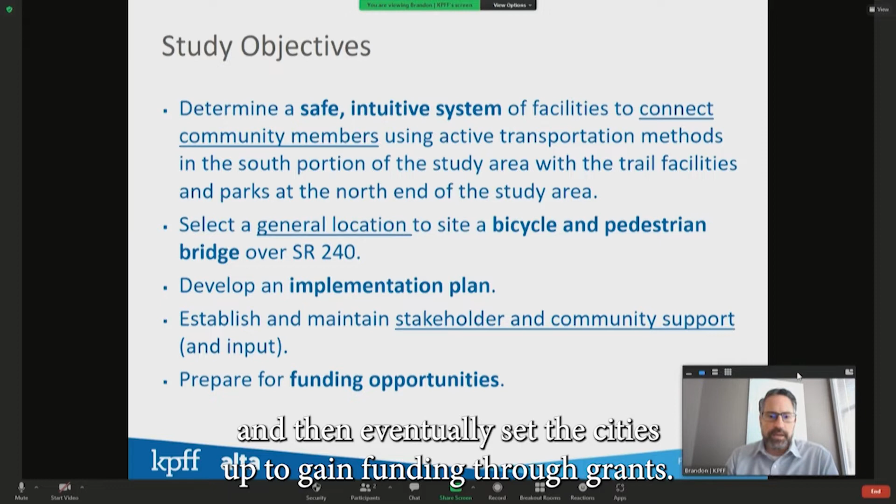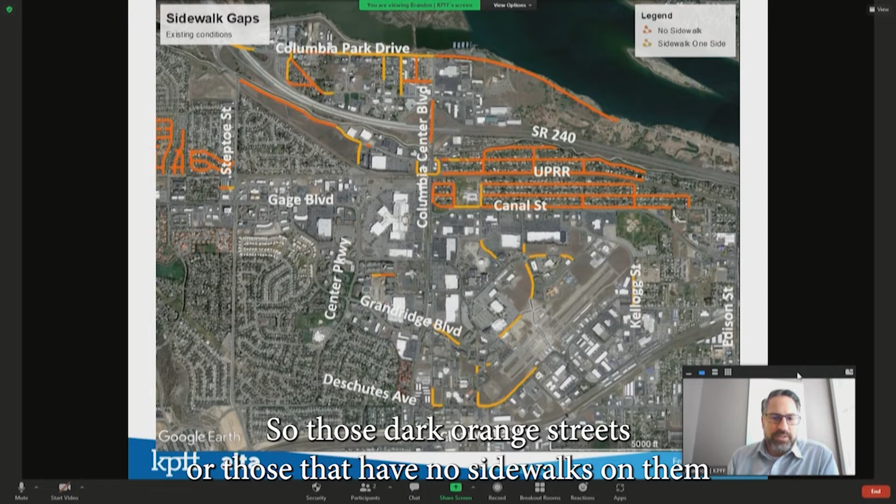So to begin with here, we're looking at the sidewalk gaps. One thing we discovered was there are certain pocket neighborhoods that were probably built in a certain time frame when sidewalks weren't required or based on certain standards. Those dark orange streets are ones that have no sidewalks on them. The lighter yellow lines represent streets that have sidewalk on one side. Those are generally in areas still under development, and the expectation is that those sidewalks will be filled in over time as development occurs.

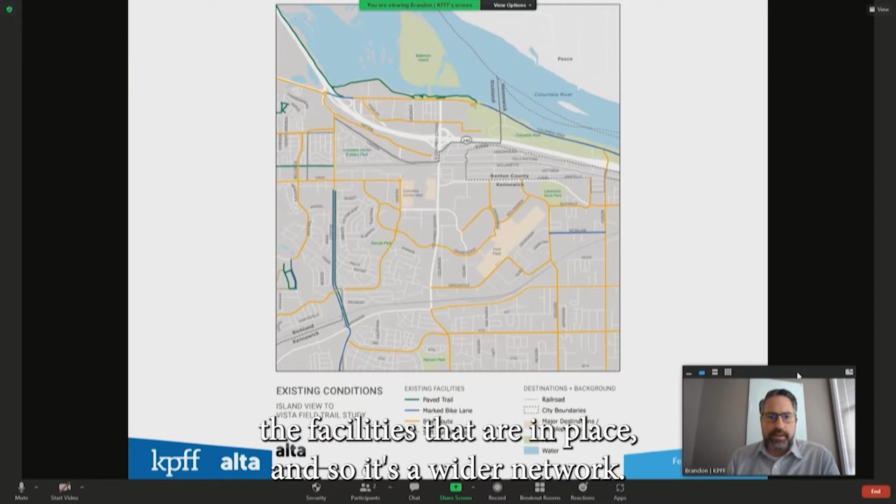When we look at the bicycle network, on the other hand, these are the facilities that are in place. It's a wider network, not as tight as the sidewalks—you try to see sidewalks on every street, but for bike facilities we look at them every quarter mile at least. These are the facilities currently in place.

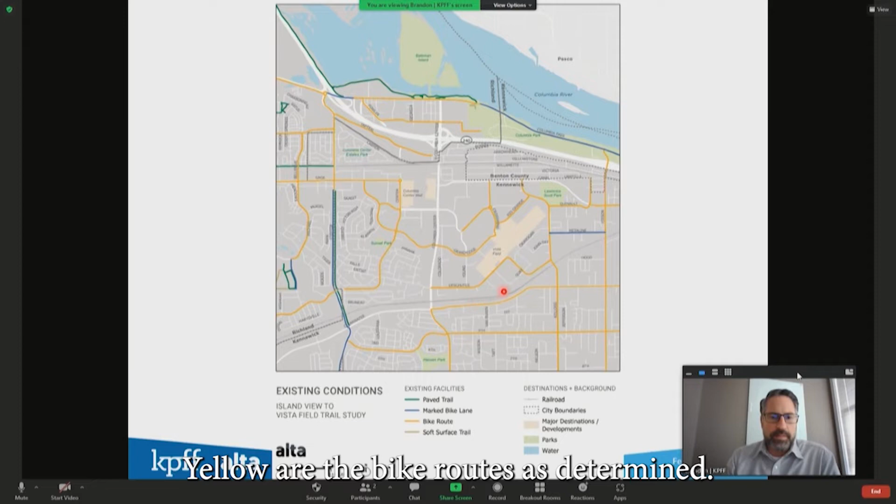You'll notice there are certain colors here. Yellow are the bike routes as determined presently—those are facilities that have a widened shoulder along the side of the street, but not necessarily a bike lane with symbols indicating that's your space. The blue lines indicate areas where there is a bike lane, and the green lines indicate trails or paths.

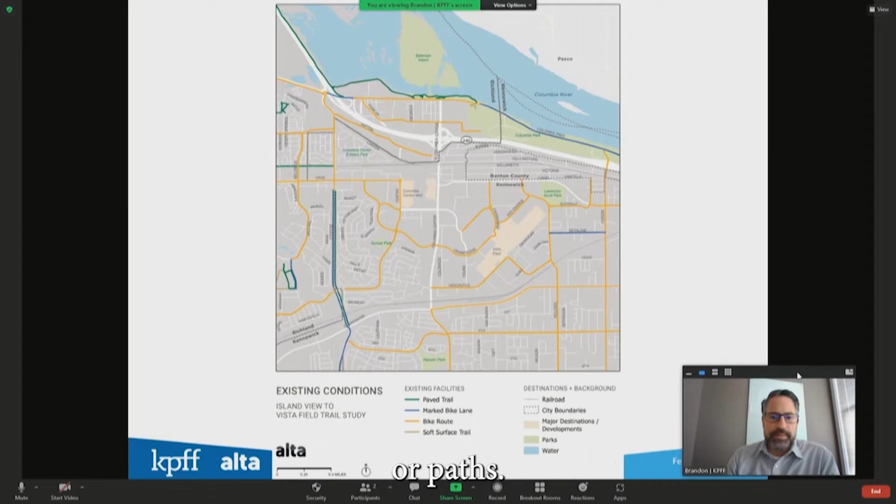We looked at this as a view of the level of stress experienced when you bicycle on these streets. We indicate that by the letters LTS, level of traffic stress, on a scale of 1 to 4. If you're on an LTS 1 street, this is comfortable for all ages and abilities—one a family isn't afraid to take their children down. This is probably a very low traffic residential street or a separated trail where there's no chance of traffic issues.

Whereas LTS 4, the other end of the scale, is high traffic with very low facility service, whether that's just a shoulder with no bike lane. Really your hardiest of riders are the ones comfortable there—if they're even comfortable, that might be a challenge to state.

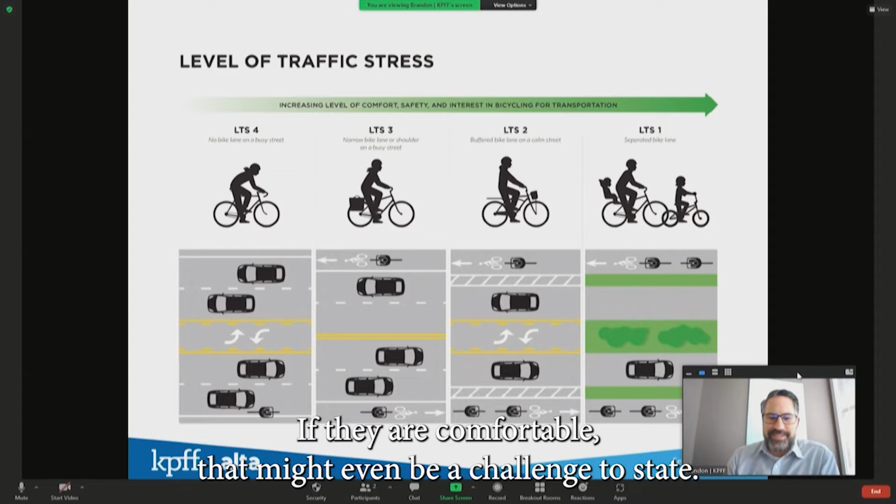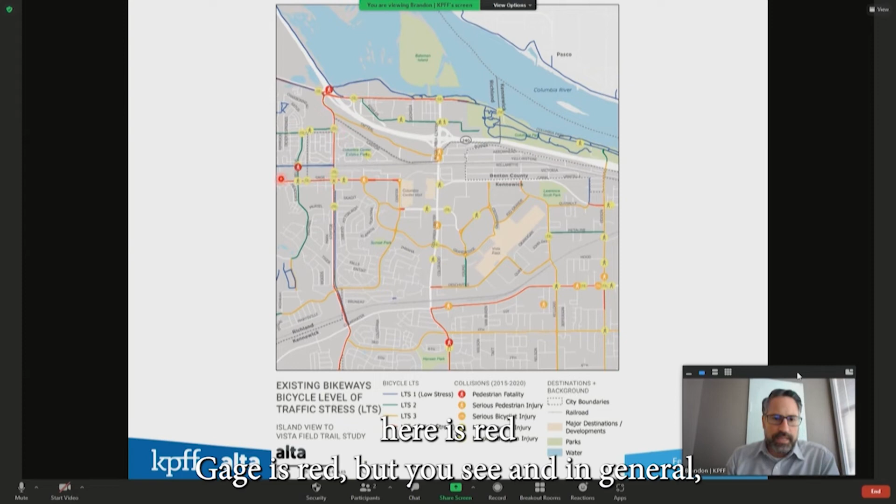Looking at those ratings on this map, the red lines represent streets that are high traffic and low level of service for the bike lane facility there. You can see Steptoe here is red and Gage is red. But in general, there's a lot of yellowish orange on this map.

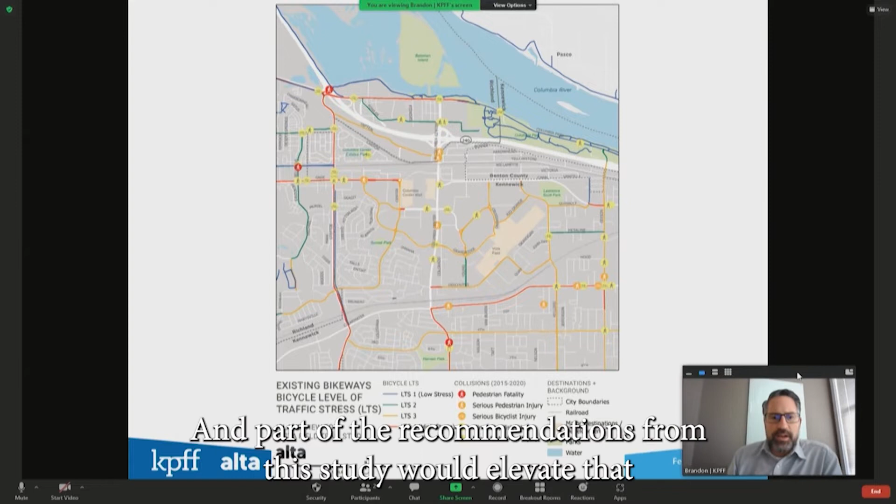That indicates level of traffic stress 3—again, streets that have a widened shoulder but not necessarily a bike lane, with moderate traffic levels. Part of the recommendations from this study would elevate that from an LTS 3 to an LTS 2. The lower number is the higher, better condition.

So our next step was to look at the planned bicycle network. These are all the streets that show up on the bike network plans for the city, the county, and the region. You'll notice it's about a quarter-mile spacing between all of these, but then there's this interesting line that goes straight across all of it, indicating the future bridging and connection to a trail. Again, this is the planned view—it's not exact, it's not perfect.

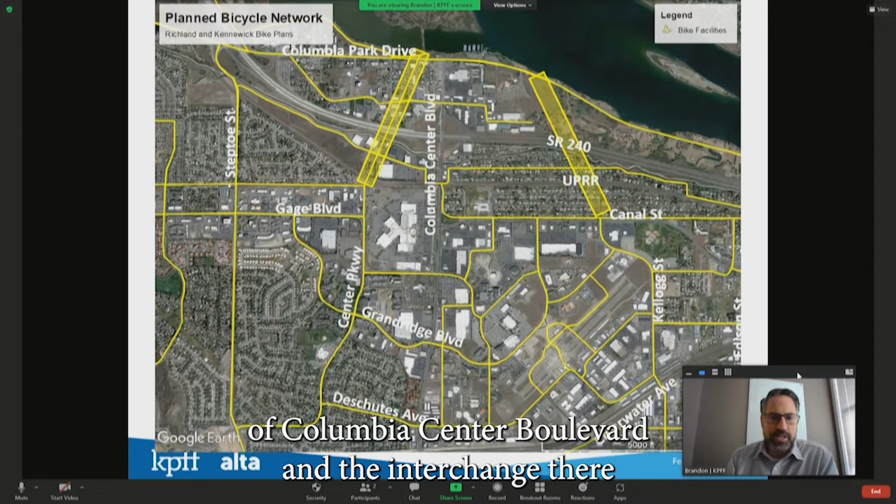As we began to look at where a bridge might best be placed over SR 240, we decided to also look east of Columbia Center Boulevard and the interchange there, and see if there weren't opportunities to connect down to the Columbia Park area as well.

As we analyzed the network, we found that these streets shown in dark blue really are the key carriers for the general network. So we're recommending, in the end, some improvements to these network lines and segments here.

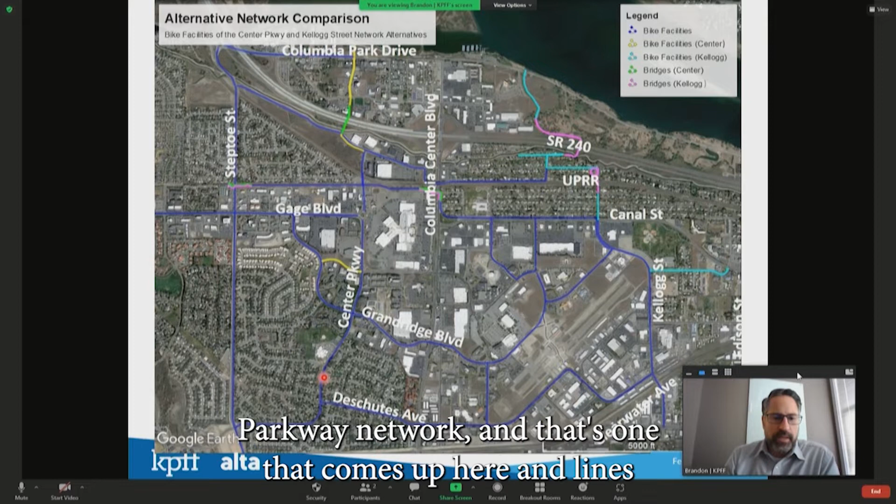We also looked at two possibilities for a network: one that caters to the east with that possible bridge alignment, which we called our Kellogg network because it's based on the Kellogg alignment lining up into the neighborhood. We also looked at a western alignment, called the Center Parkway network, that comes up, lines up across the railroad, and then connects with a western connection over SR 240.

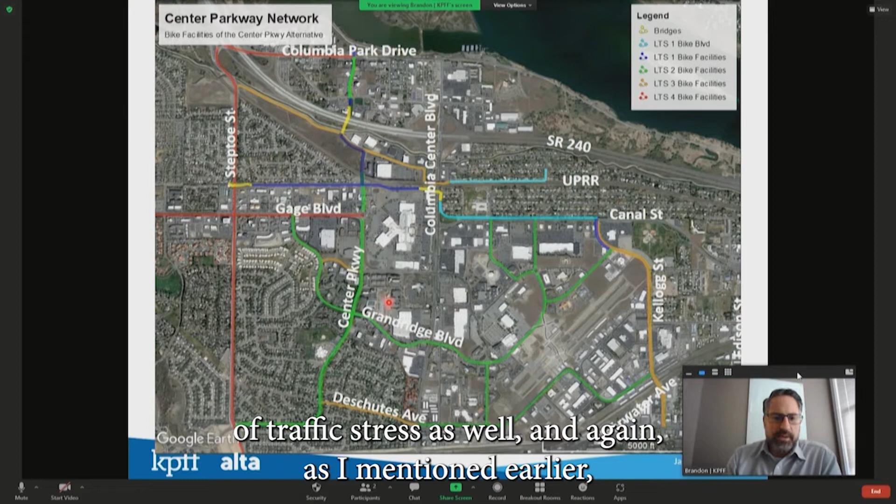So these are the streets as we would recommend them in terms of level of traffic stress. As I mentioned earlier, all of these streets that were orange in the existing condition, we recommend treatments that would bring them up to an LTS 2, this green level.

Important to this is having some LTS 1 connections, this light blue and dark blue, that take us up to the river. So any trip that may start in this Vista Field area has a short LTS 2 trip, and then connects on an LTS 1 facility for the rest of the route. This segment here may be LTS 2 or LTS 1, depending on how the facility is built in the end.

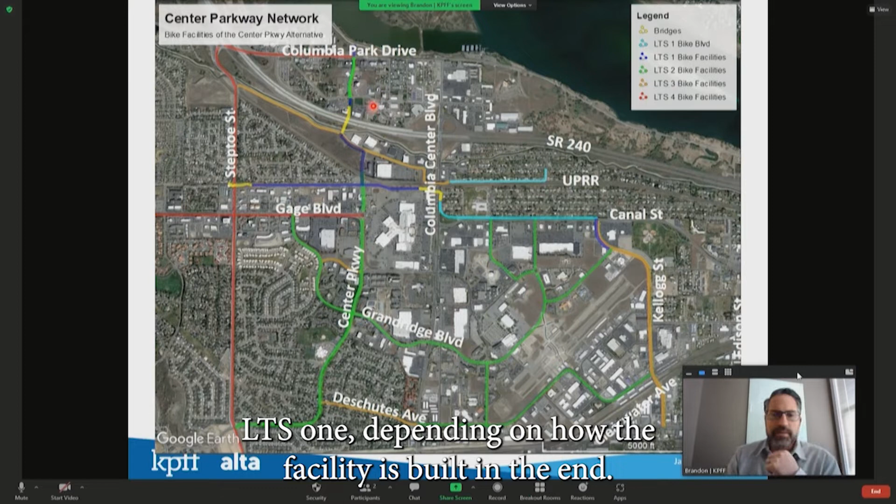One aspect I want to point out are these yellow lines. These are proposed bridge locations. We looked at several options for how to make the bridge connection over SR 240, and these are different alignments that we reviewed in great detail.

I also want to point out that we looked at ways to bridge over Columbia Center Boulevard, and these are two areas where we looked at that option.

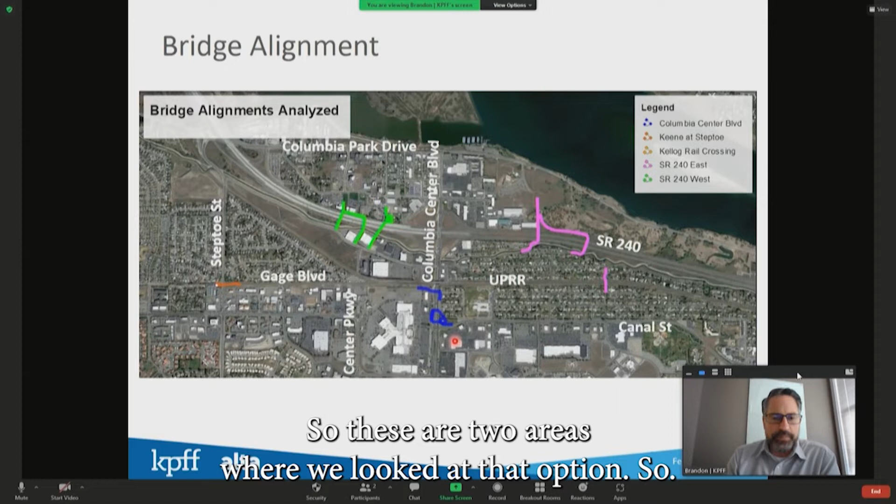So I have a couple of renderings that show what those two bridges might look like, this western alignment and this Columbia Center Boulevard alignment, because those are the two that scored best in our analysis.

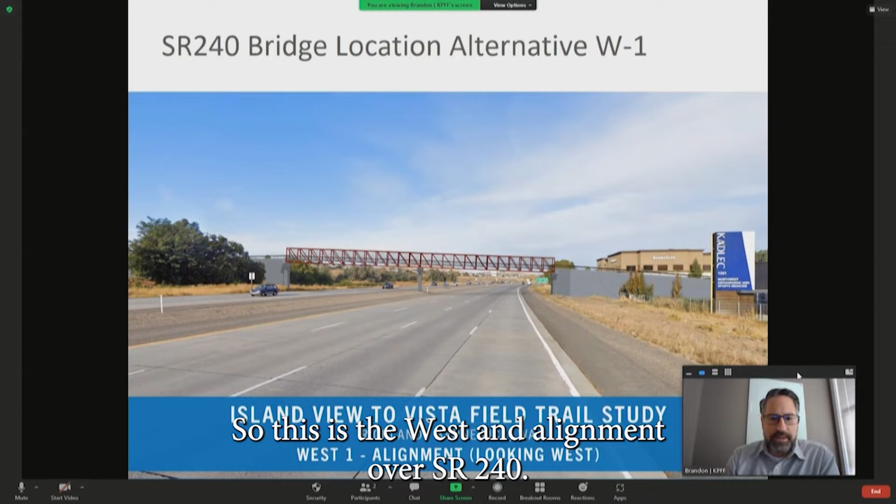So this is the west alignment over SR 240. Again, this is a mock-up, a drawing of what it might look like. We would come in over the canal at a low level, and then we'd have to be at least 18 feet above the surface of the highway as we cross over, then dropping down at a gentle slope that allows people to travel up and down relatively easily into that alignment.

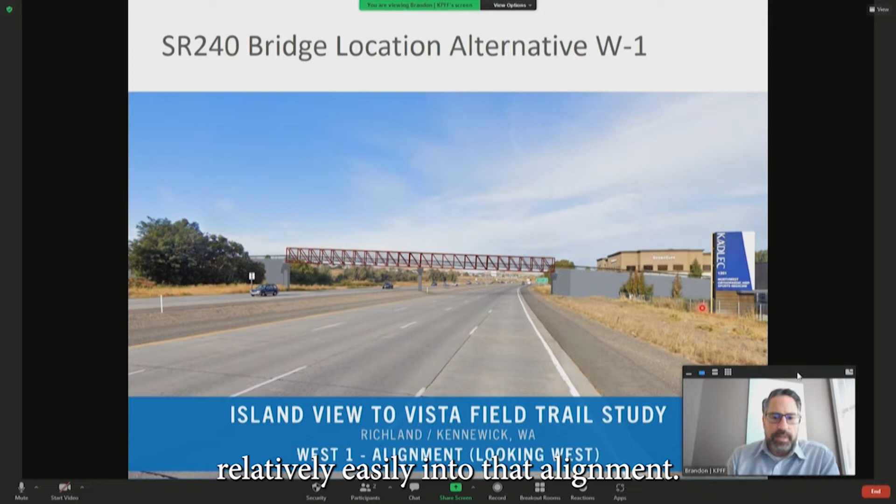This bridge is about 240 feet long, but you can see it's dropping continually. There's an elevation drop from Tapteal down across the freeway and into the neighborhood to the north.

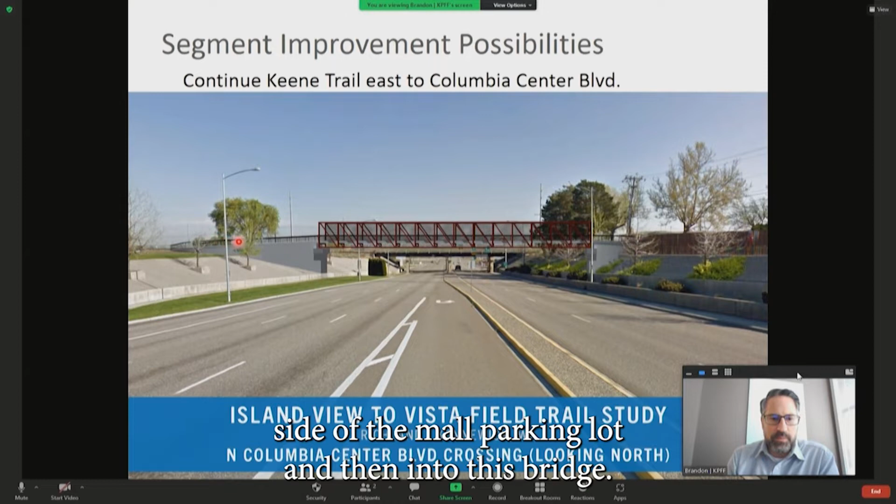When we look at the Columbia Center Boulevard alignment, this is looking north as if you're traveling north along Columbia Center Boulevard. You've got the mall here to the left, and that Keene Trail would extend across and come in across the north side of the mall parking lot, then enter this bridge. You'd be a certain height over the roadway, probably at least 16 feet.

Then it would curve and come down Colorado Street until it dropped to the right elevation, and then it would enter into the street there as a bicycle boulevard, as I indicated earlier.

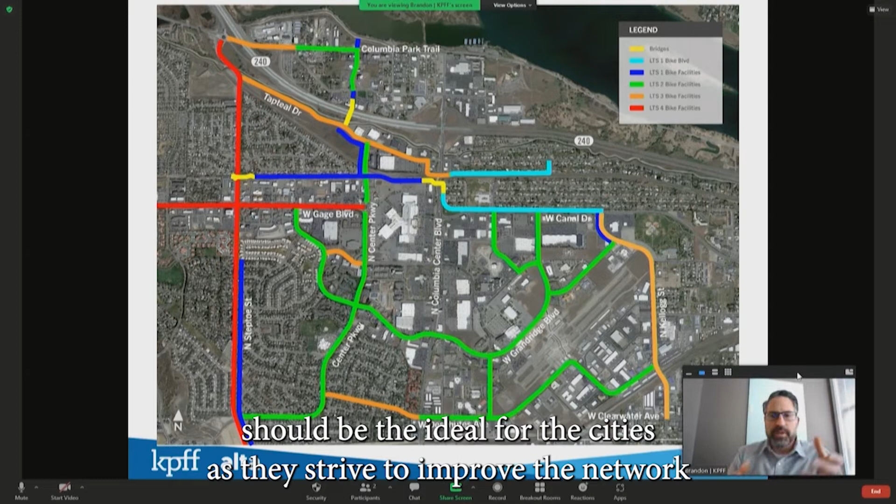So again, this is kind of the final image of the proposed network, and what we indicate should be the ideal for the cities as they strive to improve the network in terms of what level of traffic stress they should be looking to accomplish when they build these network items.

So now I want to go through some of the treatments on the ground and what they look like to create that condition for an LTS 1, LTS 2, or LTS 3.

So here is our recommendation for how to improve upon these streets listed on the left: Center Boulevard or Center Parkway, Grandridge Boulevard, and so forth.

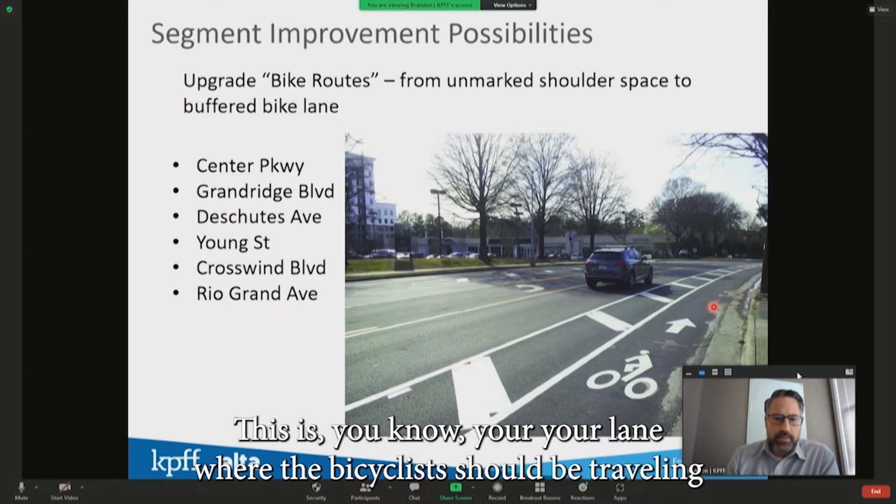This includes a bicycle lane, as you can see indicated by the marker and the arrow — this is where the bicyclist should be traveling — and a buffer space between that lane and the vehicle lane. This is important to provide a greater level of comfort for the cyclist, and also for the driver, since they don't have to worry about how close they are to that cyclist in the roadway.

When we look at this in terms of most of the streets in that network, the space available would allow for a 5-foot bicycle lane on each side of the road with 2-foot buffer width, 11-foot travel lanes for the vehicles, and 12-foot center turn lane. That's pretty common spacing and sizing across the nation for facilities of this type, and it fits for the most part on a lot of those streets.

Now, there are some pinch points that would have to be studied in greater detail in terms of the design aspects, but generally that could be improved greatly for the network.

When we look at the Keene Trail alignment, one very critical element of this whole network is bringing the Keene Trail in across Steptoe. This is where it dead ends. If you were looking east along this alignment, you just see this open abandoned railroad corridor. Connecting through that corridor over to Center Parkway and on across to the north side of the mall parking lot to this proposed bridge over Columbia Center Boulevard and then on to Colorado Street.

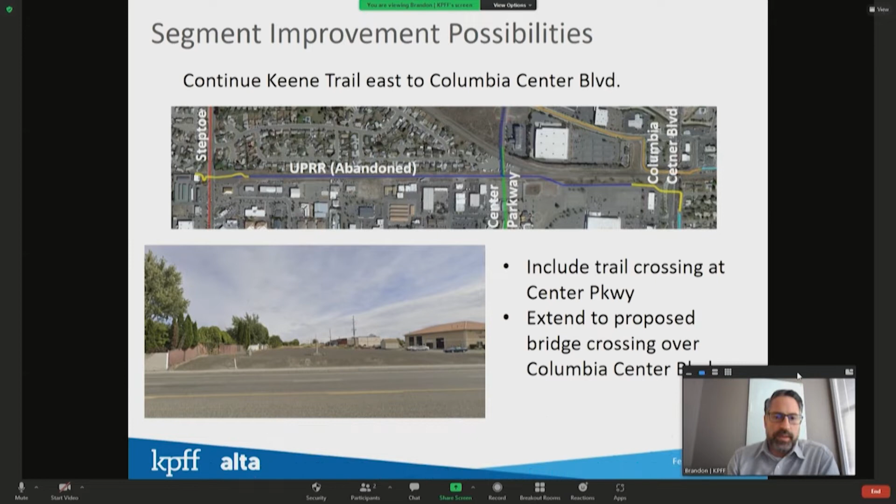As we extend further east, this is Umatilla and Yellowstone, looking at that bicycle boulevard condition. This light blue indicates a bicycle boulevard, which is a very low traffic street that people feel very comfortable walking and biking on. In my site visits there, I saw people of all ages and abilities out there on this street already, so it already sort of serves in that purpose.

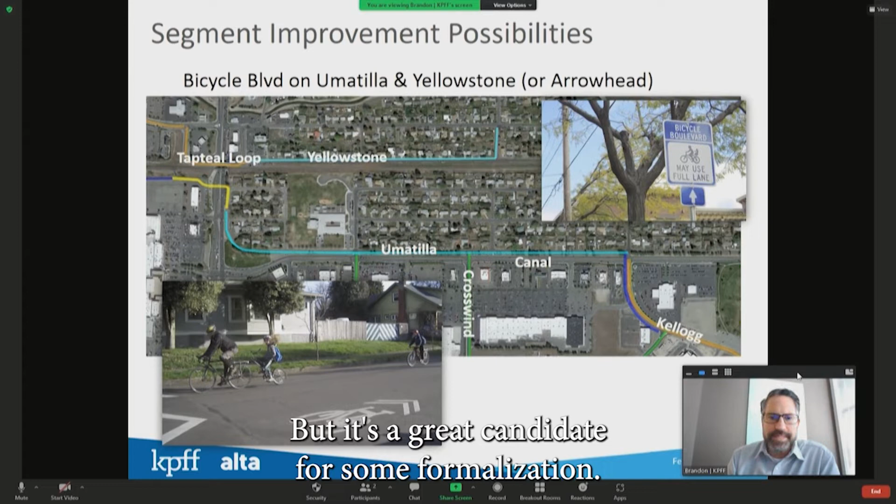But it's a great candidate for some formalization, if we were to put some symbols down and sign it, indicating to all users that this is a space for multimodal transportation, for active transportation. Also key to this is bringing in better crossing facilities for pedestrians and cyclists at key locations that would then connect into the greater network.

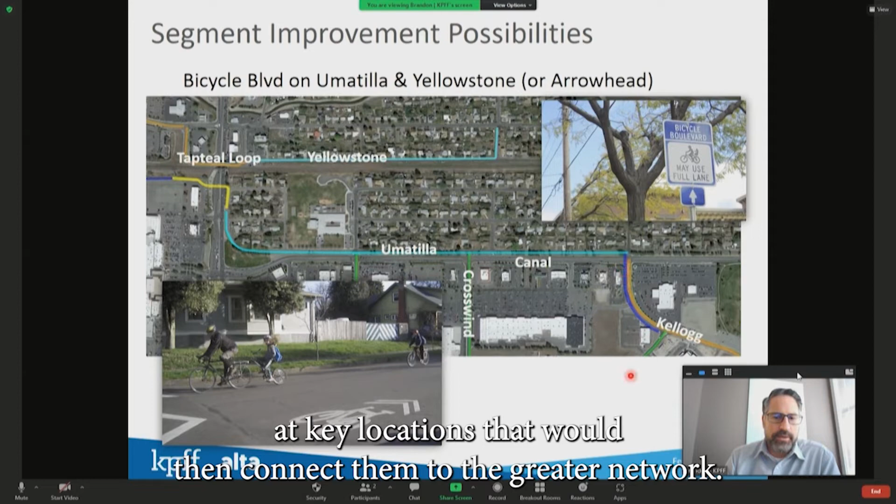And lastly, I want to point out that while we can create all these great segments of streets that have facilities on them, if we don't treat the intersections well, we sort of leave all the gaps still in place. There's presently a lot of gaps at intersections, partly because they're the most challenging areas to treat.

And also because there's space limitations and costs associated with those. So while you may be able to fit facilities along the segments, carrying them through the intersections is challenging.

So how does this all come together? We have been working closely with what we call the Public Advisory Committee. These are representatives from the community, special interest groups, or agencies that have an interest in this subject area. We met with these folks twice, once to go over the goals and initiative, the process we were going to work through, and to gather their input on what exists on the street today.

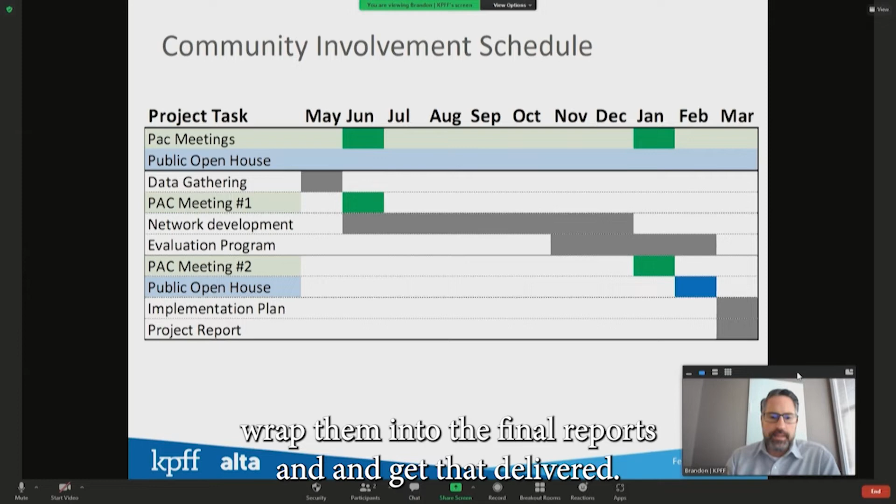So here we are, we've been through our study period from May of 2021 through now, February of 2022. This is our public open house. As we conclude and draw your comments in on this study, we'll wrap them into the final reports and get that delivered. So what is the project status?

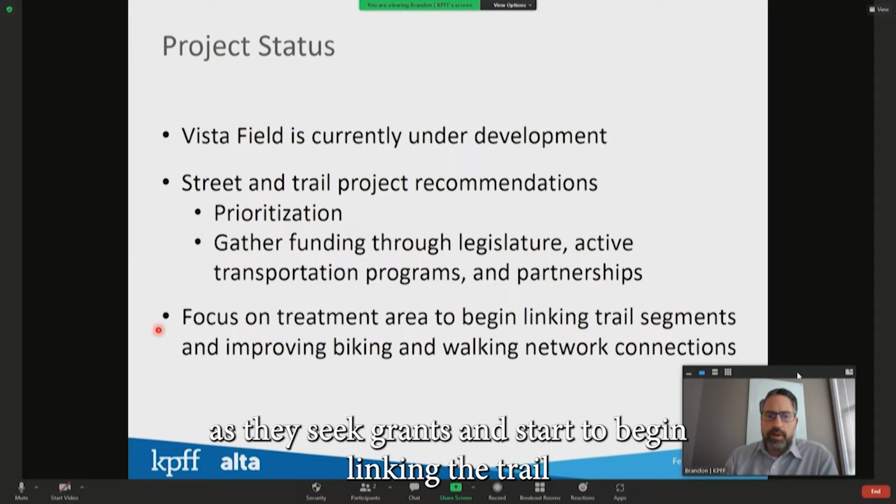When we look at this study area, there's a lot of development that is presently underway or has been underway. As we look at future development and options, we really want the city to have in hand this master plan that says, here's what we're trying to accomplish. Then they can work with developers and encourage those improvements to be included where appropriate with their developments. The cities can also focus on these treatments as they seek grants and start linking the trail and roadway segments to improve biking and walking in the area.

So in terms of the study, we'll be gathering feedback from this public outreach engagement and wrapping those into our final report. Part of that report will include an implementation plan, outlining priorities for gaps in the network that need to be treated first and will have the highest impact, and which ones should come next. We'll assemble that plan into a final report, and that should conclude the Island View to Vista Field Trail study.

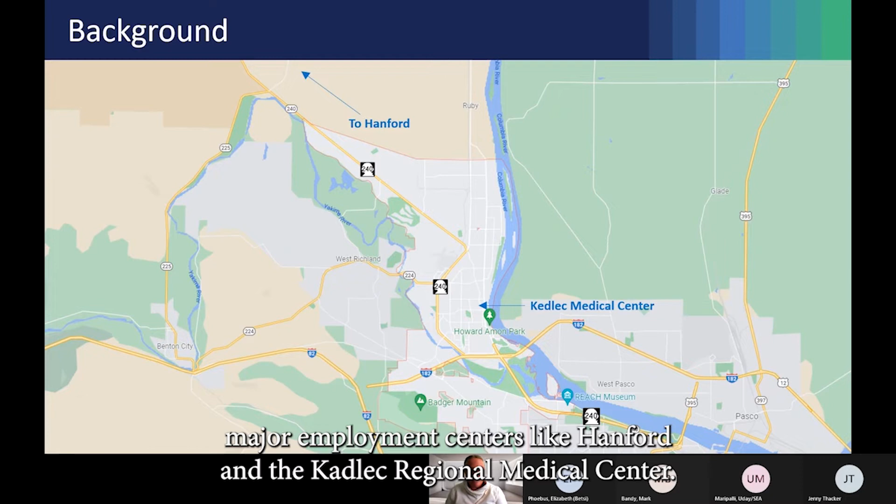Thank you, Jenny. So just a bit of background, Richland is a growing city geographically constrained between the Yakima and Columbia rivers. Major employment centers like Hanford and the Kadlec Regional Medical Center add to the volume of vehicles moving through the city. While there are large traffic volumes headed in and out of the city at different times of the day, traffic congestion peaks at intersections near the interstate in the afternoon.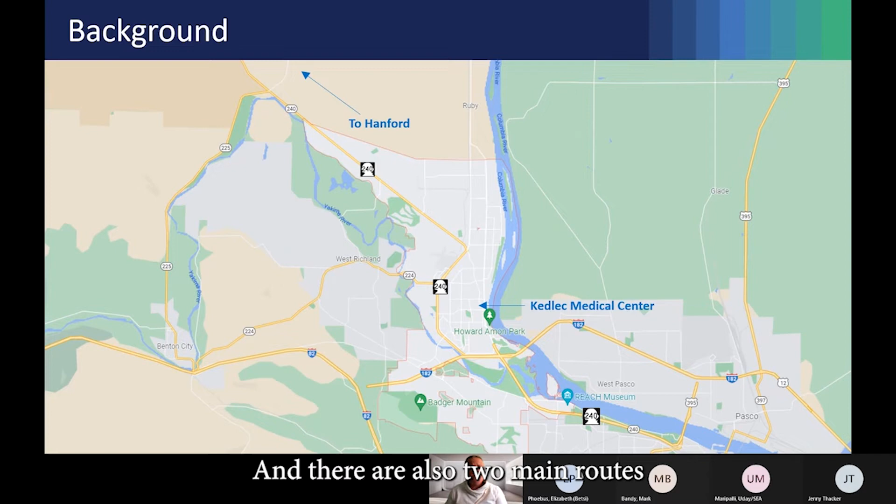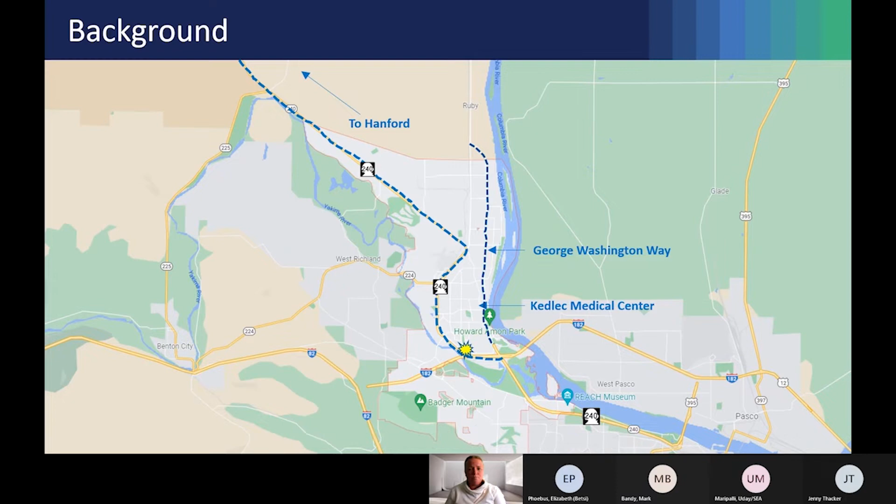And there are also two main routes in and out of the city to manage all of this traffic: George Washington Way and SR 240. This creates a lot of problems, especially where SR 240 intersects with Aaron Drive, and traffic volumes in and out of Central and North Richland are projected to continue to increase in the future, further intensifying congestion and delays. And where traffic congestion increases, so does the potential for increased traffic collisions.

So today you'll hear from my team, who will address the need for improvements at Aaron Drive along SR 240 and how those improvements address safety and congestion for all transportation users. This includes cars, freight, pedestrians, and bicyclists.

The purpose of the project is to look at ways to solve those problems, and in doing so, increase mobility for freight and commuter traffic, increase safety for freight and commuter traffic, and take advantage of this work to resolve an existing gap in the pedestrian and bike facilities between Central Richland and the regional trail system that provides access to the waterfront recreational facilities, to the South Richland developments, and to Kennewick and Pasco.

We had a lot of technical experts and engineers thinking about the problem, but our collaborative efforts to solve the issues at Aaron Drive has also been inclusive, with participation by the Federal Highway Administration, Washington State Department of Transportation, Benton Franklin Council of Government, other key stakeholders, and the general public, so we could get everyone's perspective.

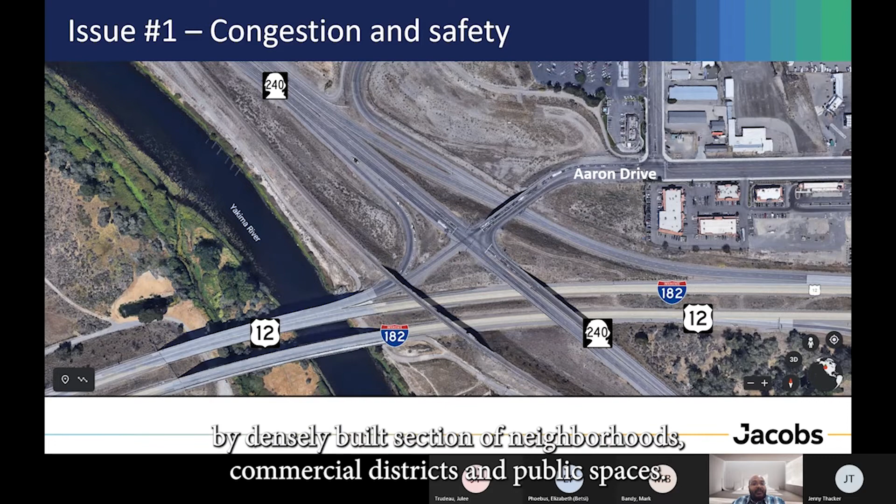Thank you, Julie. Now let's take a closer look at the issues that this project is trying to solve. The first issue Richland asked us to look at was ways to ease congestion at this interchange, especially during the afternoon drive time when it starts to get congested. SR 240 is a major transportation route that is surrounded by a densely built section of neighborhoods, commercial districts, and public spaces. The traffic volumes into and out of Central and North Richland are projected to increase in the future, which will only make the congestion worse in the future.

One of the main issues is that all traffic on SR 240 needs to go through a signalized intersection at Aaron Drive, whether those vehicles are continuing on SR 240 or turning into Richland. That means the traffic backs up on SR 240 as vehicles encounter the light. Typically, this happens during the evening rush hour, but drivers could encounter it at other times throughout the day. This also leads to safety issues.

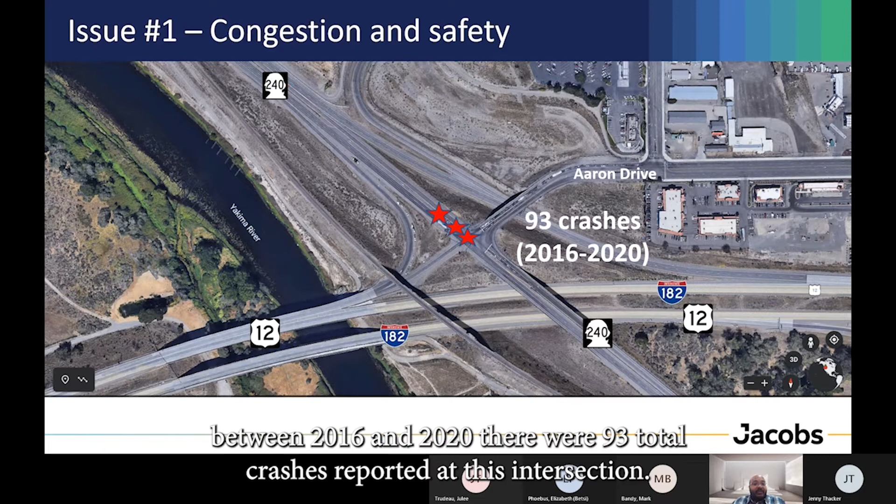Part of our role was to collect crash data from 2016 to 2020. And we discovered that between 2016 and 2020, there were 93 total crashes reported at this intersection. 33 crashes resulted in injuries and 60 were limited to property damage only, which is approximately one-third of the collisions that have resulted in injuries.

The other issue we were asked to solve with this project is to improve active transportation facilities along Aaron Drive. Active transportation network refers to trails, sidewalks, and paths that let people get around without using a car or other motorized vehicle. The Aaron Drive SR240 intersection is a prime area for active transportation.

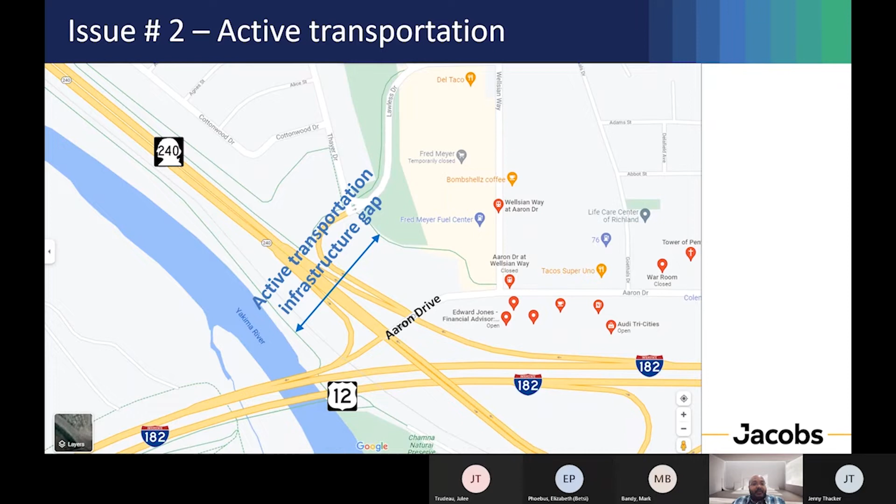It connects residential and shopping areas to the north and east with Yakima River and Chamna Natural Preserve to the west. The green lines on the map show existing pedestrian trails located on either side of SR240.

As you can see, currently SR240 and the SR240 Aaron Drive intersection are a substantial barrier between residential and commercial properties located along Aaron Drive and the regionally connected trails along Yakima River.

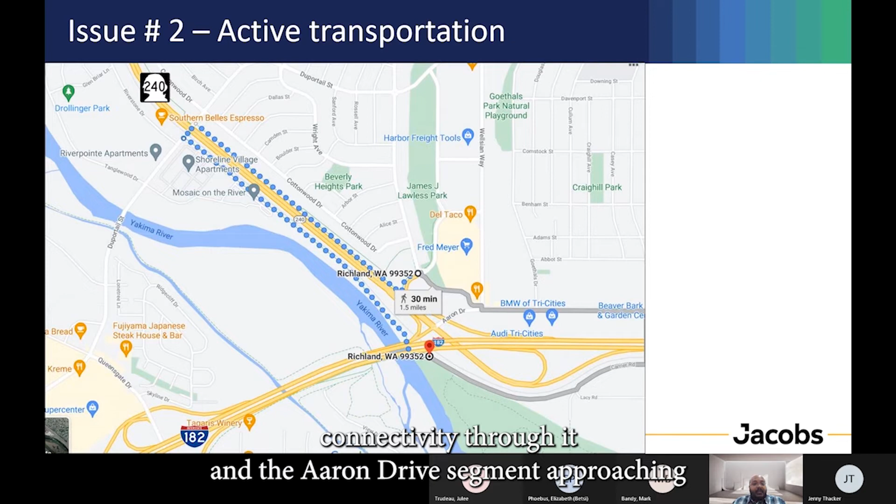The SR240 Aaron Drive intersection does not provide any active transportation connectivity through it, and the Aaron Drive segment approaching this intersection does not have any bicycle or pedestrian facilities.

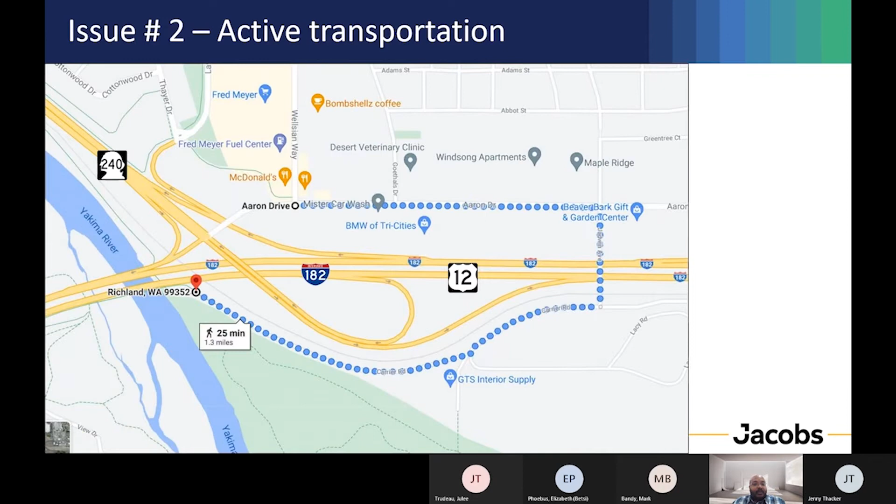Currently, pedestrians and cyclists who want to access the trails along Yakima River and Chamna Natural Preserve need to travel northwest via the multi-use path on SR240 and cross at Duportail Street, then travel south, or travel east on Aaron Drive and cross SR182 at Jadwin Avenue and then travel west on Carrier Road. Both routes are approximately 1.5 miles long and require crossing multiple intersections and driveways.

Up next, Mark Bandy will discuss the alternatives evaluated to solve the traffic congestion and safety concerns.

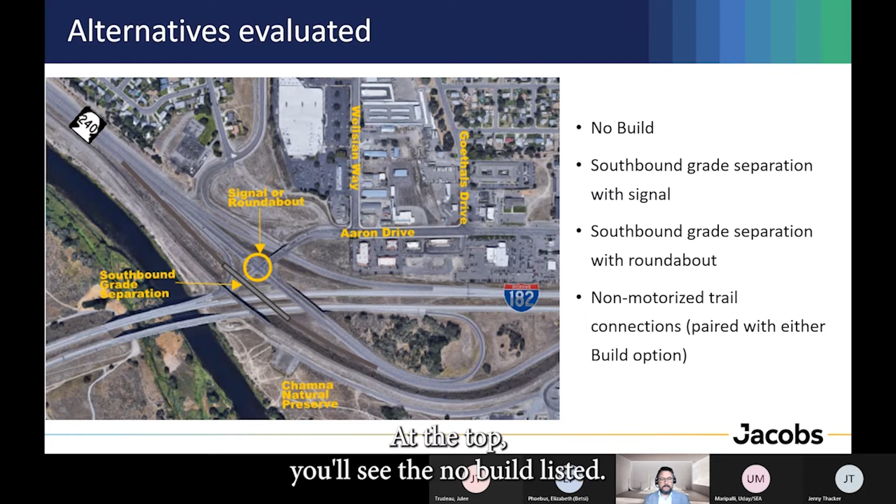Thanks, Uday, for describing the problems we're trying to solve. On this slide, we show the alternatives we came up with and evaluated to solve for those issues, listed on the right side here. At the top you'll see the no-build option, which just refers to leaving things as configured today. That's what we compare other alternatives to.

We also have two solutions that both include a southbound grade separation for SR240 going over I-182. They're paired with either a traffic signal at Aaron Drive and 240 like there is today, or paired with a roundabout. We'll go into this in more detail in a minute, including the non-motorized trail connection that will solve for the gap.

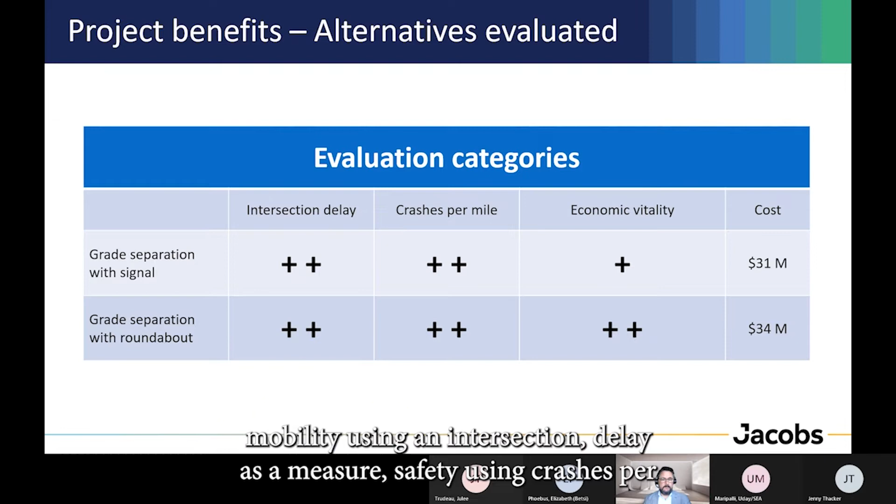On this slide, we're showing how we evaluated the alternatives compared to the current configuration. We evaluated them in three primary categories: mobility, using intersection delay as a measure; safety, using crashes per mile as the measure; and economic vitality, using freight travel time as the measure. We also compared the estimated cost of the two alternatives.

Our evaluation was based on traffic volumes, both in the near term and looking at future volumes 20 years from now. To simplify this analytical comparison, we used a relative rank of improvement compared to the current configuration. In the table, a single plus symbol means an alternative performed somewhat better than the current configuration, and two pluses means it performed considerably better.

Both alternatives performed considerably better in the mobility and safety categories, and better in the economic vitality category, with the roundabout at Aaron Drive and SR240 performing a bit better than a traffic signal. In the cost category, the alternatives are similar in construction costs, with the grade separation plus roundabout being slightly higher. But as noted, this alternative performs better in reducing freight travel time through the intersection.

Based on those evaluation results, the preferred solution is to move forward with a southbound grade separation and a roundabout at the intersection. In addition, we would build a multi-use path that would connect from Aaron Drive down to the Yakima River Trail. You can see those elements here, and we're now going to go through them in more detail, beginning with Uday.

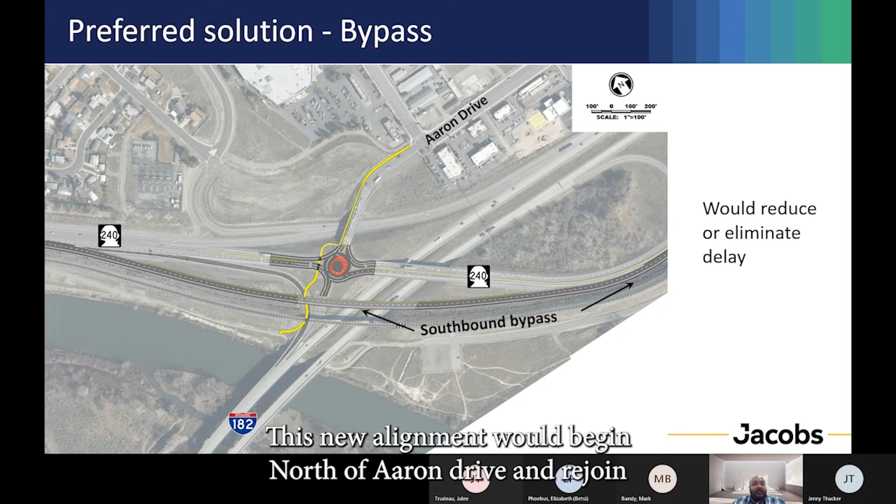Thank you, Mark. You can see the southbound SR240 grade separation running from left to right in the middle of the graphic, also labeled as southbound bypass. This new alignment would begin north of Aaron Drive and rejoin the ramp onto I-182 in the same manner as today. The revised intersection of SR240 and Aaron Drive as a roundabout is shown in the center of the graphic, and you can see the multi-use path connected from Aaron Drive through the roundabout and connecting to the existing path along Yakima River.

This preferred solution is anticipated to provide significant improvement to traffic operations. Traffic traveling on southbound SR240 to eastbound 182 can bypass the Aaron Drive intersection, resulting in lower delays and shorter queuing along both southbound and northbound SR240 approaches at Aaron Drive. The Aaron Drive approach at this intersection is also anticipated to see improvement in the form of reduced delay and shorter queues. In addition, travel times for freight along SR240 will also be improved.

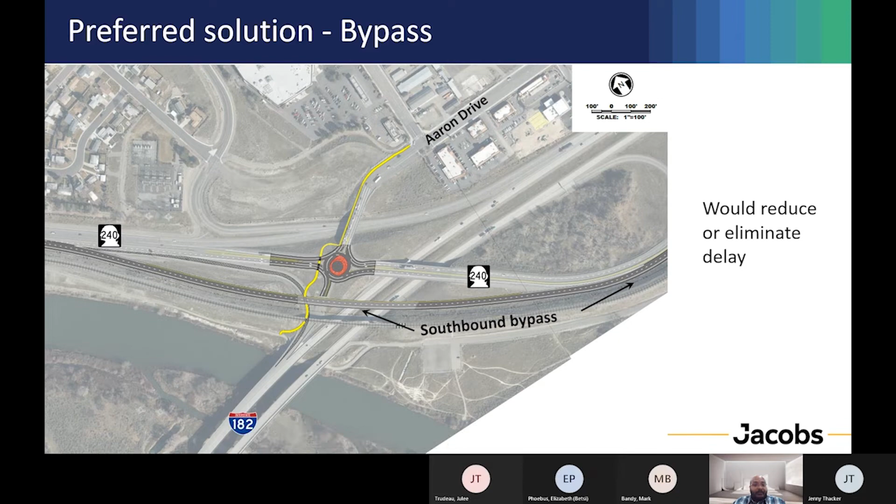In terms of safety, roundabouts are typically found to have fewer injury and fatal crashes compared to traffic signals. Lastly, roundabouts frequently cost less to maintain over the long term compared to traffic signals.

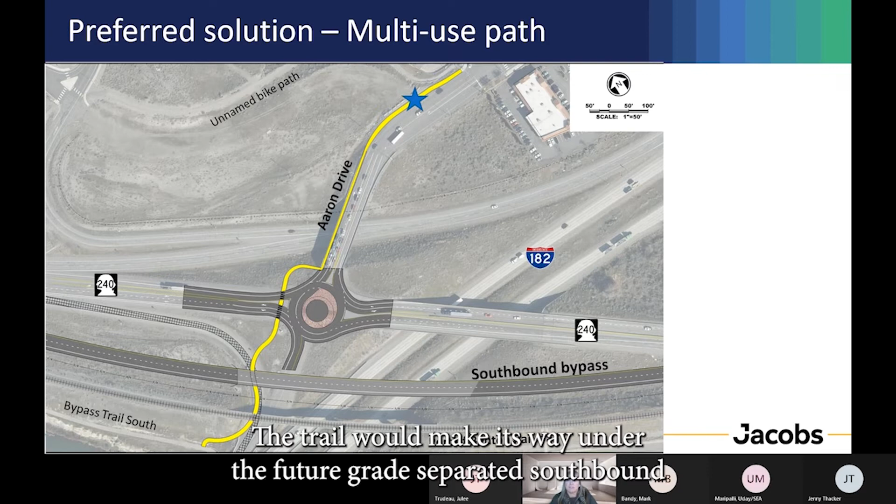From north to south, the new path would start at a currently unnamed bike path near the Aaron Drive intersection with Wellsian Way. It would run south along Aaron Drive on the existing bridge over the SR 240 ramp and then through the intersection with SR 240. South of SR 240, the trail would make its way under the future grade separated southbound bypass and finally under the existing Port of Benton Railroad to connect with paths along the Yakima River and in the Shamna Natural Preserve.

The city can make this connection happen with the new grade separation and also by reconfiguring the ramp between SR 240 and Interstate 182 West. The ramp would be modified to go through the Aaron Drive intersection. These modifications will allow the city to provide a protected crossing through SR 240, through I-182, and beneath the rail line for pedestrians and bicyclists and other non-motorized users.

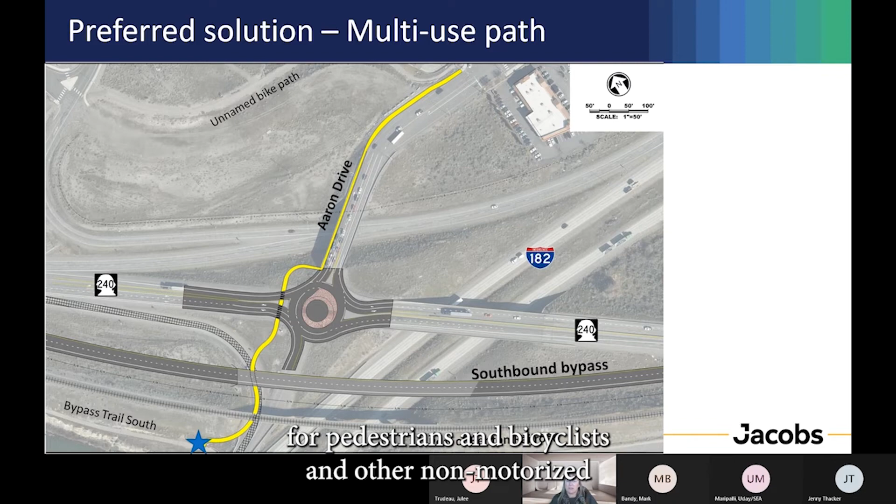The primary benefit of this new path is a more direct connection between trail systems in central Richland to trails along the Yakima River and in the Chamna Natural Preserve. As Uday described earlier, the current routes between trail systems require non-motorized users to travel 1.5 miles to access the preserve and the river from Aaron Drive. This new connection would shorten the route to just one-tenth of a mile.

In addition, this protected multi-use path would be at least 10 feet wide and compliant with the Americans with Disabilities Act. Reducing the length of the connection also reduces the number of potential conflict points where bicyclists and pedestrians cross vehicle traffic. Currently, there are about 10 to 20 potential conflict points, and this new multi-use path would reduce that to about 3 to 5.

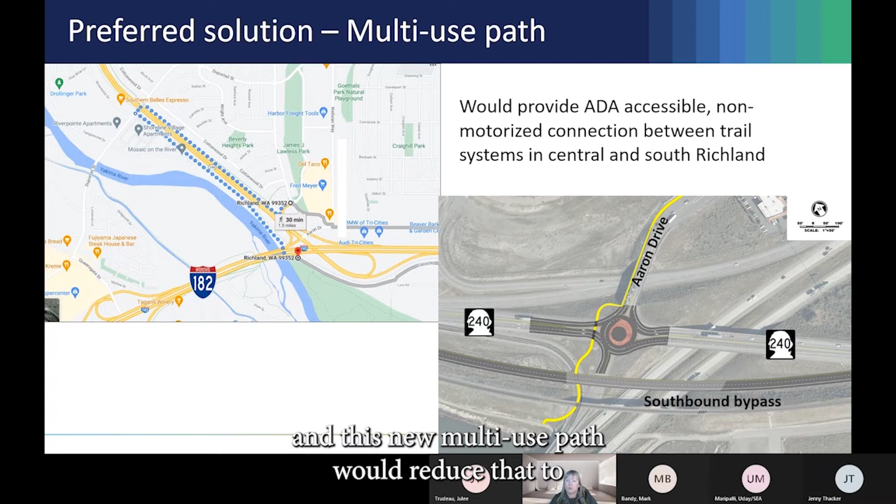On a regional scale, the multi-use path will also provide improved connectivity between the on and off-street active transportation facilities in central Richland and the regional trail systems that provide access to waterfront recreational facilities, to South Richland developments, and to Kennewick and Pasco.

Throughout this presentation, you've heard ways in which this project would benefit the Richland community and people traveling through the project area. The project team has described how the preferred solution would allow southbound SR 240 traffic to flow freely and would reduce congestion at several key intersections along Aaron Drive and along SR 240.

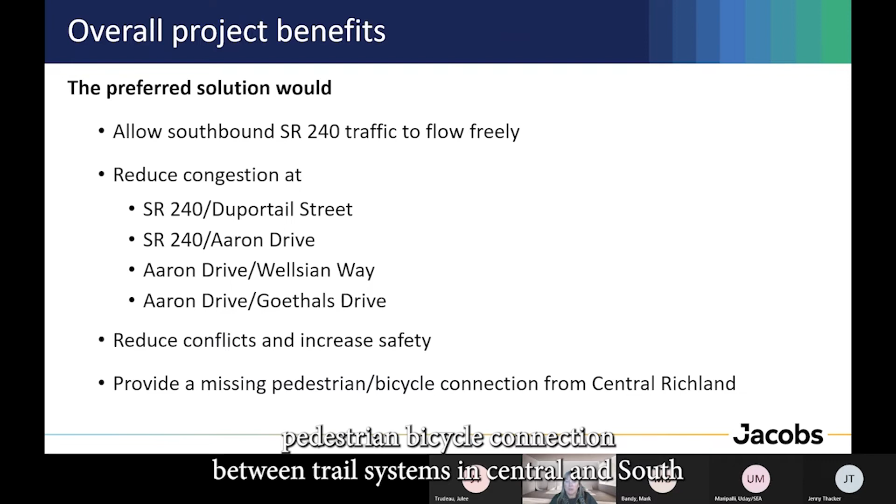The southbound bypass lane, along with the roundabout at Aaron Drive and the new active transportation path, would improve safety by reducing conflicts between vehicles and non-motorized users. Finally, the preferred solution would remedy the missing pedestrian and bicycle connection between trail systems in central and south Richland, thereby improving connectivity for people not traveling by car or truck.

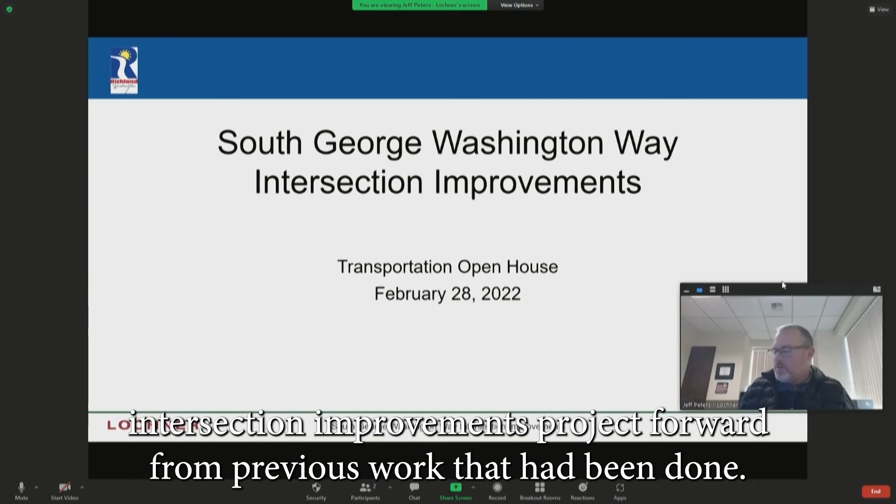Hi, I'm Jeff Peters, project manager for Lochner. We were selected by the city to carry the South George Washington Way intersection improvements project forward from previous work that had been done. So I'm going to do a brief presentation on what we've accomplished so far and where we are right now and how we're going to move forward.

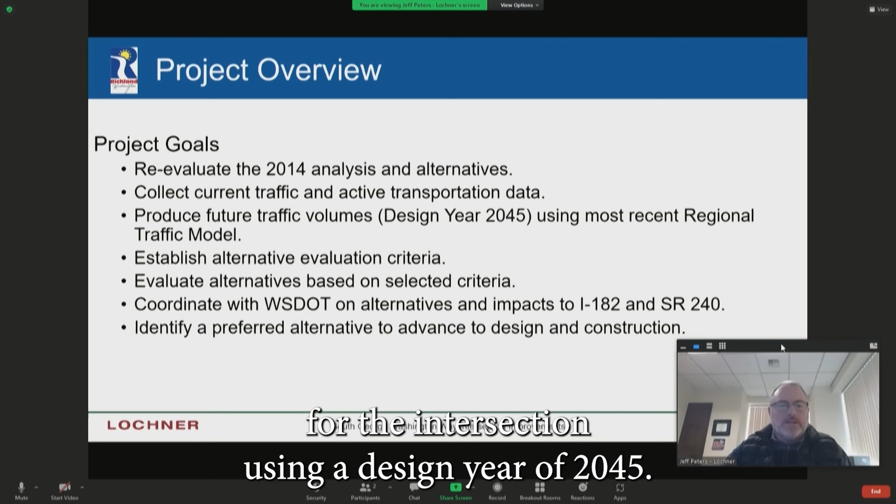So the goal of the project at this point is to reevaluate the 2014 analysis and alternatives that were developed at the George Washington Way, Columbia Point Drive intersection, collect some current data, traffic data, and active transportation data, determine and produce some future traffic volumes for the intersection using a design year of 2045 with the updated and most recent regional traffic model.

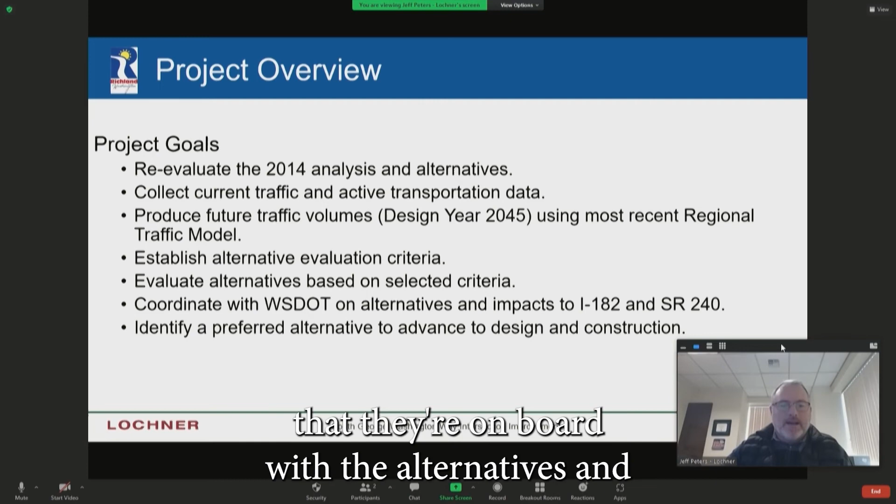And then establish some alternative evaluation criteria in conjunction with the city. Evaluate all those alternatives based on the selected criteria and coordinate all of that and the alternative evaluation with WSDOT to ensure that they're on board with the alternatives and any impacts, and identify any impacts to I-182 and SR-240, and then identify a preferred alternative that can advance to design and construction.

The purpose and need for the project itself was identified to reduce congestion on South George Washington Way. As we all know, the PM peak is pretty congested on George Washington Way. So this project was identified to try to reduce congestion there.

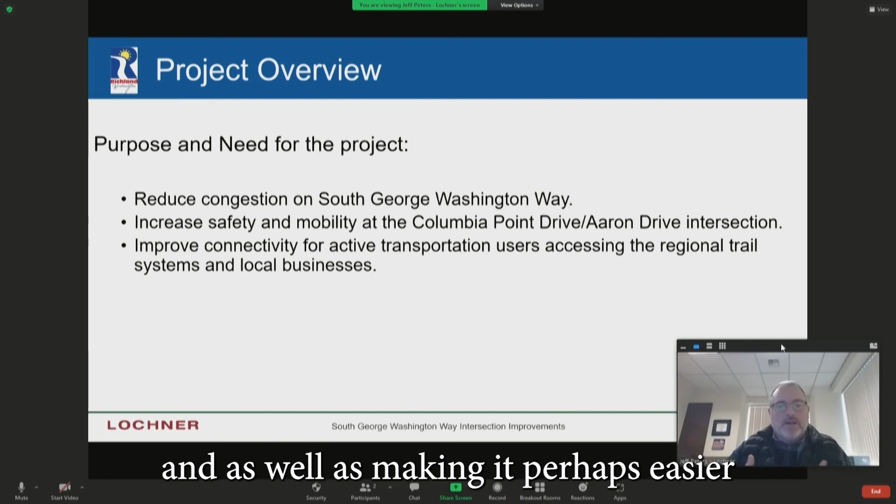Also to increase safety and mobility at the Columbia Point Drive, Aaron Drive intersection, and to improve connectivity for active transportation users that are using the regional trail systems, as well as making it perhaps easier for them to access local businesses.

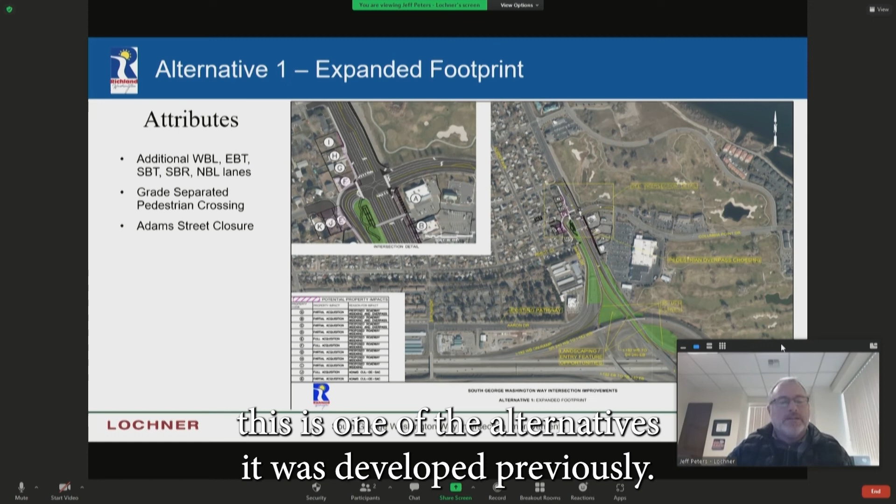So I'll go through the alternatives that we evaluated and looked at, and some of these alternatives were identified in previous work in that 2014 study, and then some of them were developed during this process. So alternative one is just an expanded footprint of the existing signalized intersection. This is one of the alternatives that was developed previously. And this essentially just adds lanes to the existing intersection, but also includes a grade separated pedestrian crossing there.

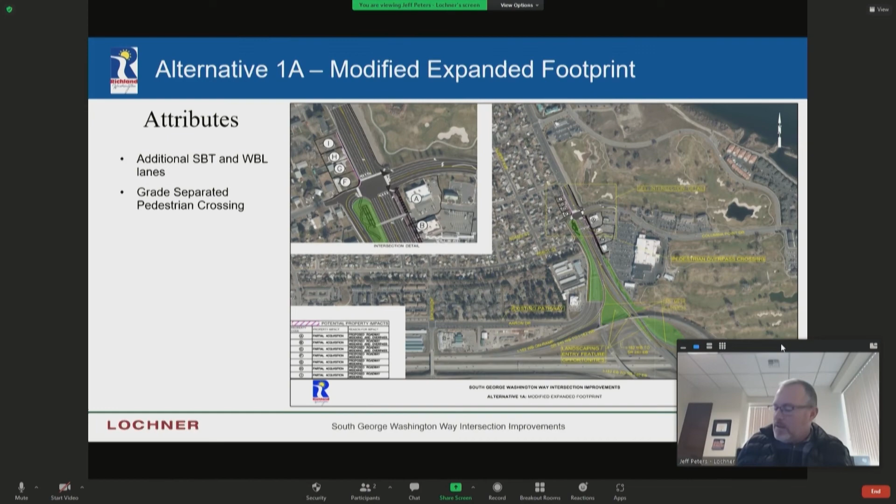Alternative 1A is a modified version of that expanded footprint. This alternative was developed during our process, and it's kind of a smaller version of that. It only adds one southbound through lane and one westbound left turn lane instead of all the other additional lanes. This also includes a grade separated crossing.

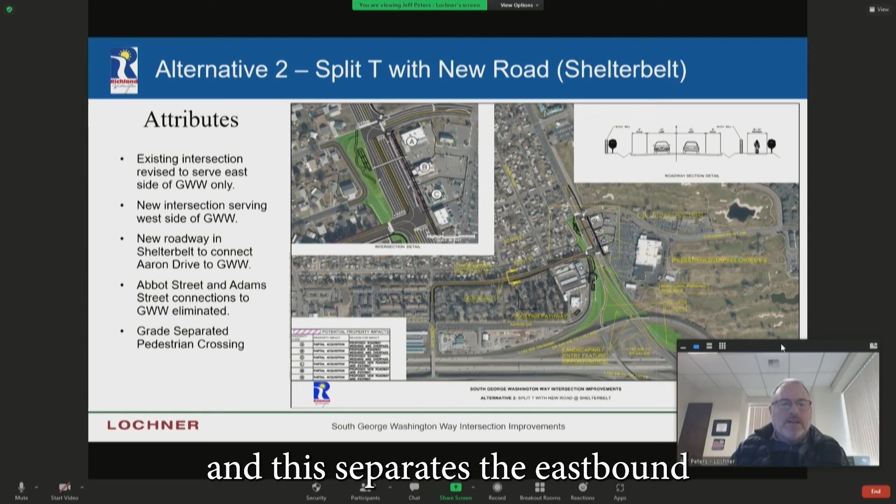Alternative 2 is one that was developed previously, and this is the first of kind of the split T configurations where we introduce a new intersection to the south of the existing intersection, and this separates the eastbound and westbound movements into their own intersections. This particular alternative did that on the west side of George Washington Way by a new road that would go down the Shelterbelt and tie into Jadwin Avenue and then Aaron Drive.

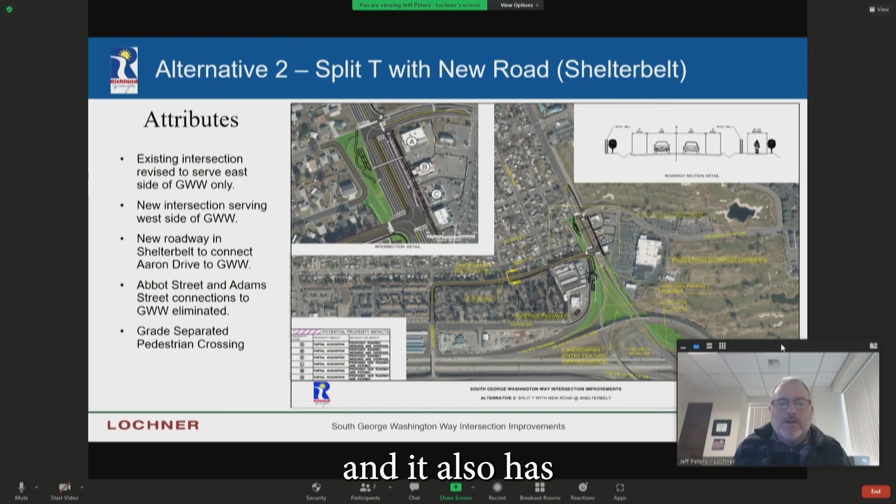It would put a cul-de-sac at the end of the existing Aaron Drive. So it's a completely new roadway, and it also closes some of the connections with Abbot and Adams Street to George Washington Way due to that configuration. All of these alternatives include a grade separated pedestrian crossing.

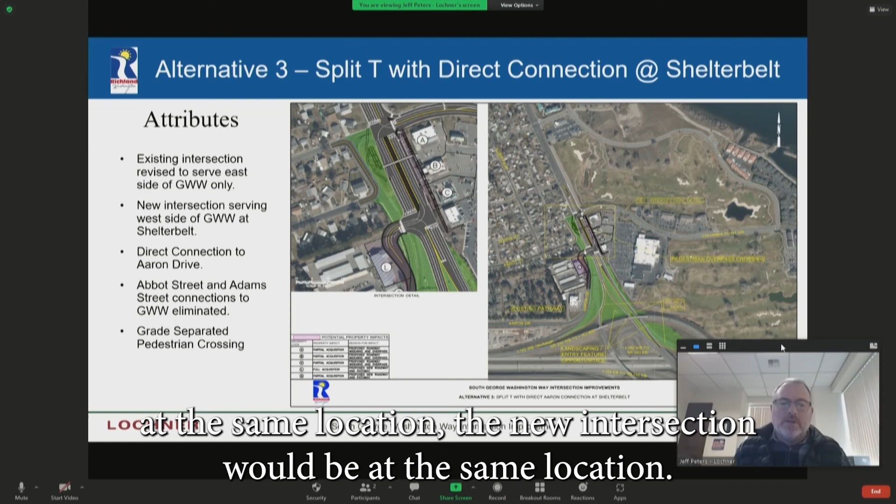Alternative 3 is a split T, but at the same location. The new intersection would be at the same location, but instead of having the connection go down the Shelterbelt, it would just loop right around and tie into Aaron Drive, kind of like the current roadway does now.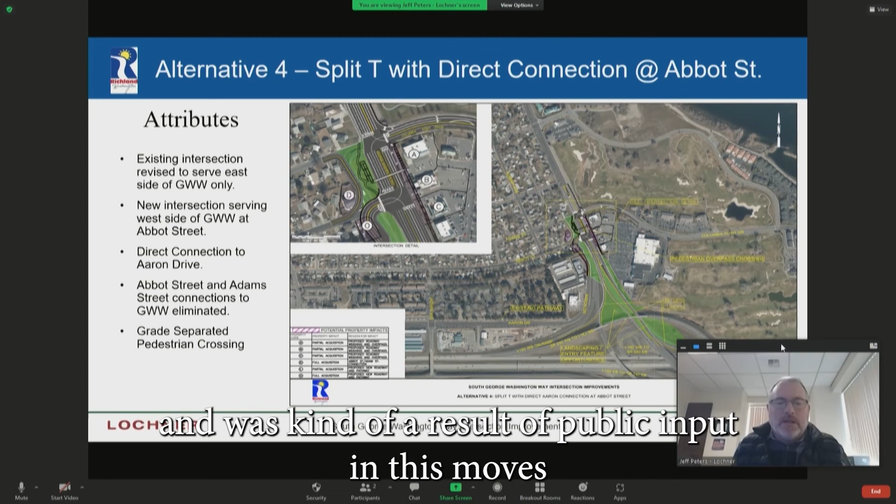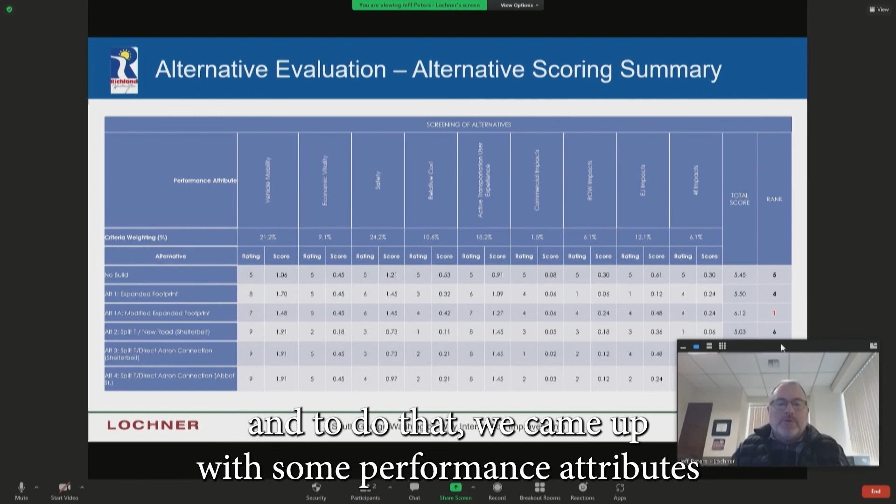So from there, we evaluated those alternatives. And to do that, we came up with some performance attributes that we would use to screen all the alternatives and score them.

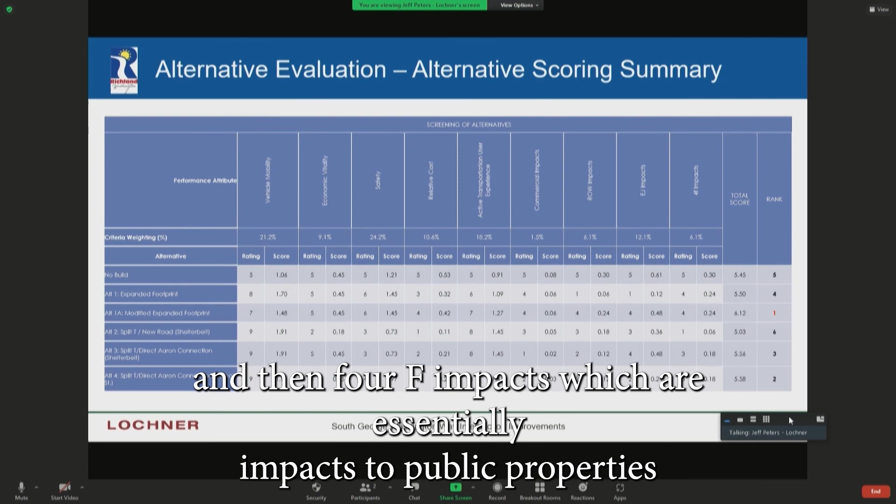We looked at vehicle mobility, economic vitality, safety, relative cost, the active transportation user experience, commercial impacts, right-of-way impacts, environmental justice, which is more community type impacts, and then 4F impacts, which are essentially impacts to public properties like the shelter belt and the golf course and those sorts of things.

So we had the city, and we worked with the city and WSDOT to develop these. The city prioritized those and gave them a weighting criteria. And then we went through and scored each of the alternatives on a 1 to 10 scale on how they address those attributes.

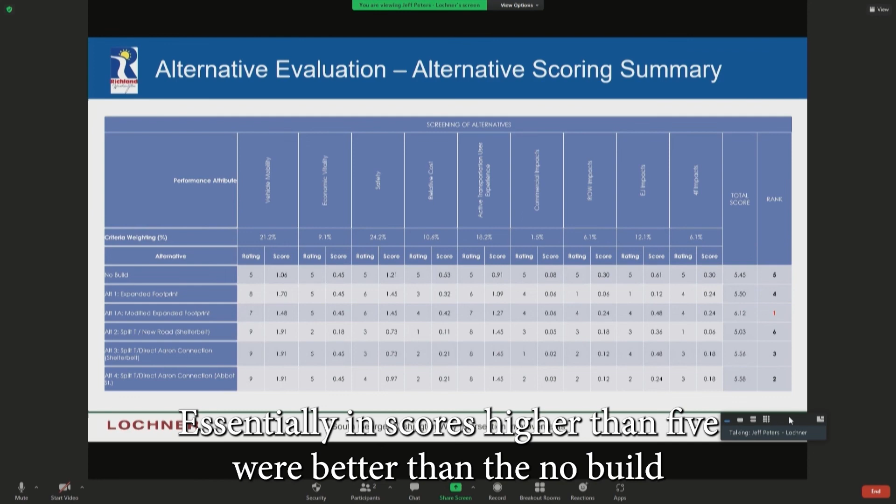A score of 5 was basically no change, and that's why you'll see the no build scenario has 5s across the whole thing. Scores less than 5 means it was worse than the no build condition, and scores higher than 5 were better than the no build scenario.

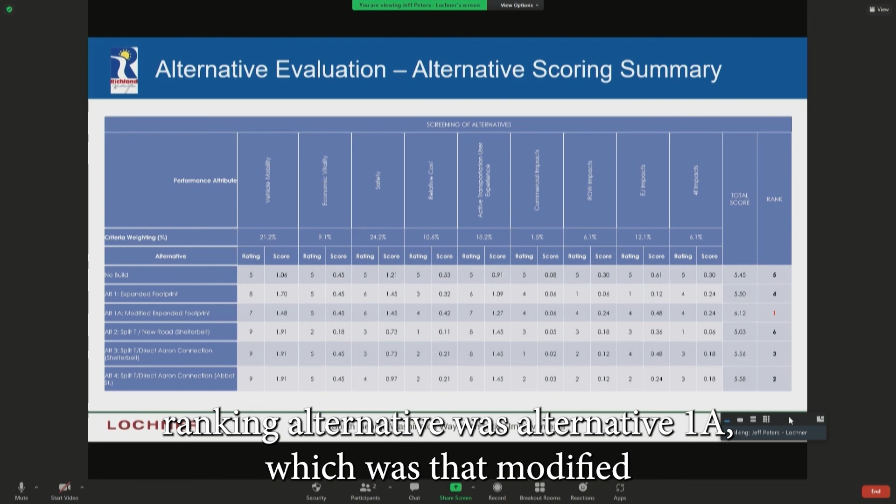So we went through, scored those, came up with a total score for each of the alternatives, including the no build, and then ranked them based on their score. As you can see here, the number 1 ranking alternative was alternative 1A, which was that modified expanded footprint of the existing intersection.

So with that, I'll go through and show you a little bit more about why, and what the benefits are to that preferred alternative. What this alternative does is add a new southbound lane that will be both a through and a right turn lane to George Washington Way at the intersection and carry that through the intersection to the ramps.

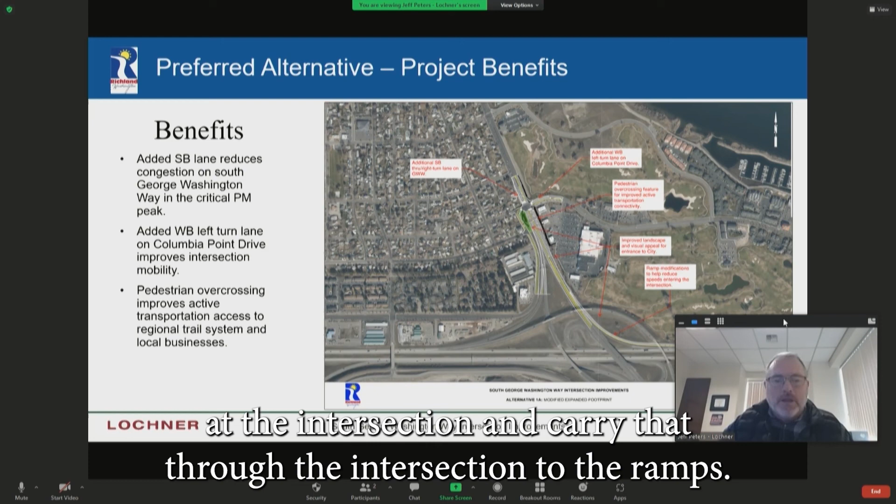It also creates a new westbound left turn lane on Columbia Point Drive. The reason for that is because those were identified as the predominant movements that create most of the congestion or delay at that intersection. So this alternative looked at what we could do if we just focused on that, and whether that would provide enough improvement.

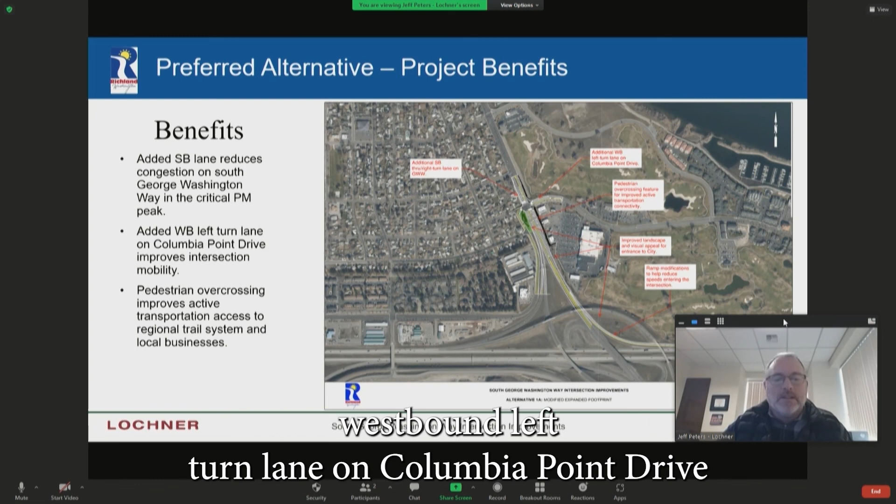That's essentially what this alternative does. It reduces the congestion on South George Washington Way, which was one of the criteria, purpose and need of the project. The additional westbound left turn lane on Columbia Point Drive improves the intersection mobility and functionality, which again was identified as a purpose and need of the project.

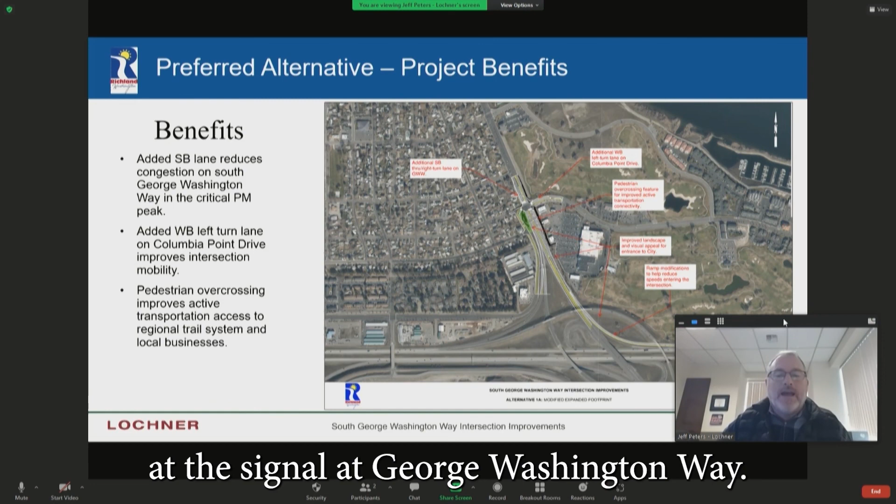And then of course the pedestrian overcrossing provides an improved active transportation element to the project and allows for a better experience for active transportation users not having to try to cross at the signal at George Washington Way. Now, at this point in time, we also are still permitting an at-grade crossing at the signal, but this gives an alternative for people that don't want to use that. And the more people that use that, the better the intersection actually functions.

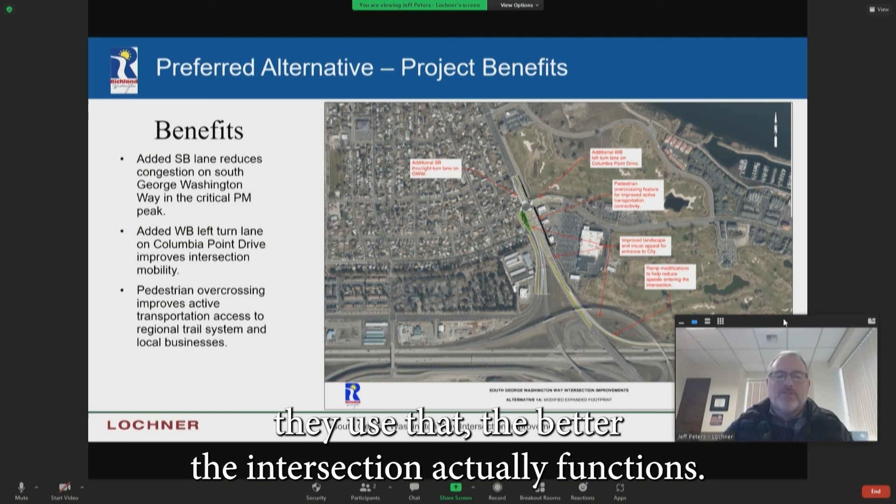So our next steps and where we're at now. The project is currently funded and has dedicated funds available to begin the design of this preferred alternative. We are in the process of getting started on that. It will produce the detailed design, the environmental permitting, and the construction plans, with an anticipation that we're going to start here in March and be prepared for construction in 2023.

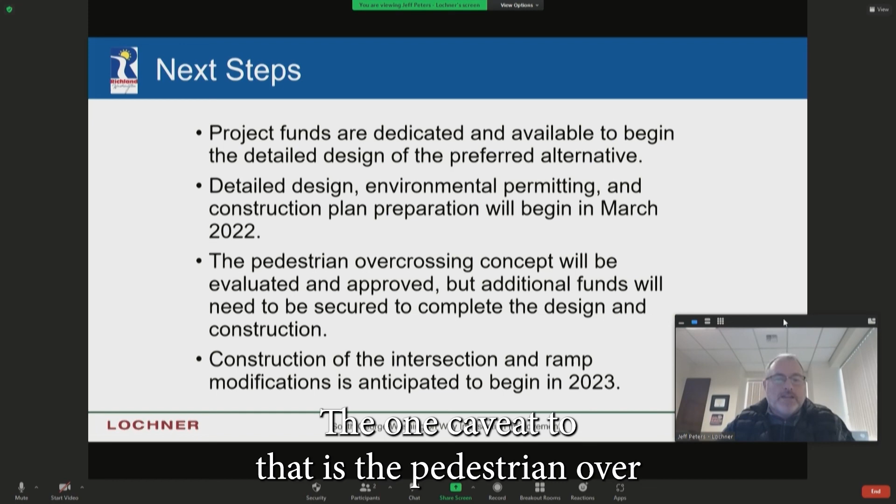The one caveat to that is the pedestrian overcrossing concept is not fully funded at this point in time, so additional funds will need to be secured for that. We're working through the scope right now and have identified that we will do some preliminary work to make sure that the pedestrian overcrossing fits with the design we're going to be doing, and there won't be any conflicts, but we are currently not planning on including the full design package for the pedestrian overcrossing in our current plans.

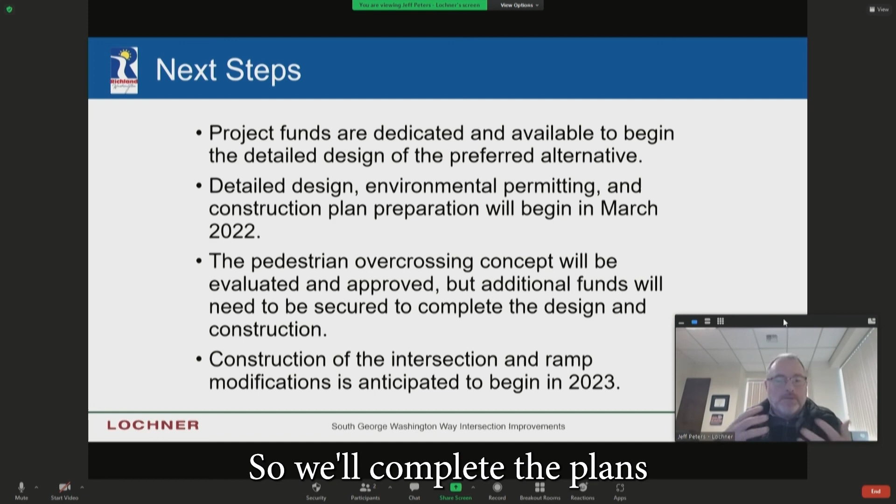So we'll complete the plans, get them ready for advertisement, and it's anticipated that the construction of the intersection and any ramp modifications will begin sometime in 2023.

That's all I have for today's discussion, and I'll be available and hanging around for the rest of this to answer any questions you might have.